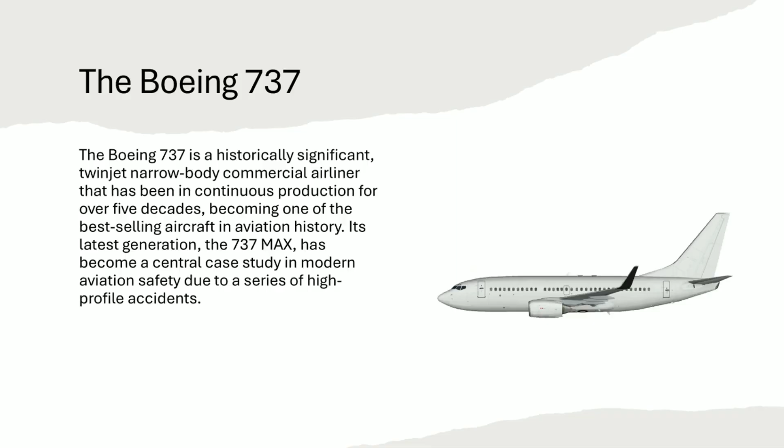The original series of the Boeing 737 was the Dash 100 and Dash 200. Development began in the early 1960s to meet the demand for short-haul jet transport, competing with aircraft like the Douglas DC-9. The 737 introduced underwing engine placement for easier maintenance and a wider fuselage, offering 6 abreast seating, which was a competitive advantage. The 737 was one of the first jets designed for a two-person flight deck, eliminating the need for a flight engineer and setting an industry standard. The first flight was in April 1967 and it entered service in 1968.

The 737 Classic series consists of the Dash 300, 400, and 500. Introduced in the 1980s, these variants incorporated more fuel-efficient, quieter CFM56 turbofan engines, which required flattening the bottom of the engine nacelles due to low-to-the-ground wing placement. The series included longer fuselage options and featured updated avionics.

The next generation, or NG series, consists of the Dash 600 through the Dash 900. Launched in the 1990s to compete with the Airbus A320, the 737 NG received a major redesign, including new wings, an updated flight deck, and a further range and efficiency boost. The 737-800 became a best-selling variant.

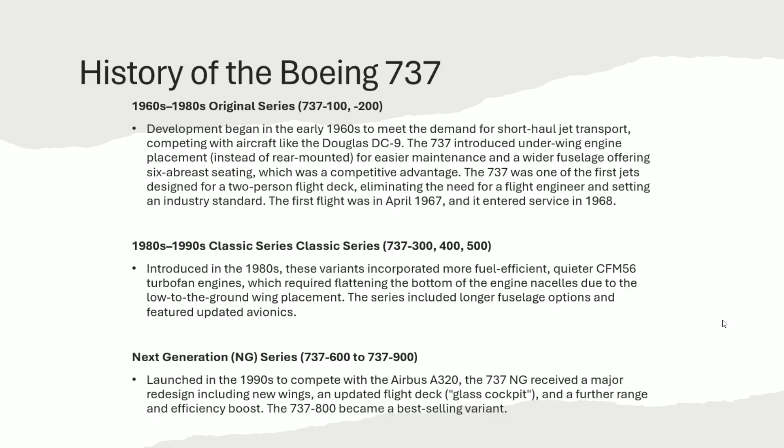The Boeing 737 MAX is the fourth generation of the 737 family, announced in 2011 to directly counter the fuel efficiency of the Airbus A320 Neo, or new engine option, by using new, larger, and higher bypass LEAP 1B engines and updated aerodynamic features, including new winglets.

A key feature of the MAX was the new engine placement. The larger LEAP 1B engines were placed slightly higher and further forward on the wing. This change affected the aircraft's pitch characteristics, giving it a tendency to pitch up during certain high angle of attack maneuvers. The MCAS system, the Maneuvering Characteristics Augmentation System, was meant to ensure the 737 MAX handled similarly to the previous 737 NG series, thus avoiding costly full flight simulator training for pilots.

Boeing introduced the MCAS software. This system was designed to automatically push the aircraft's nose down to counter the pitching tendency, using data from a single angle of attack, or AOA, sensor.

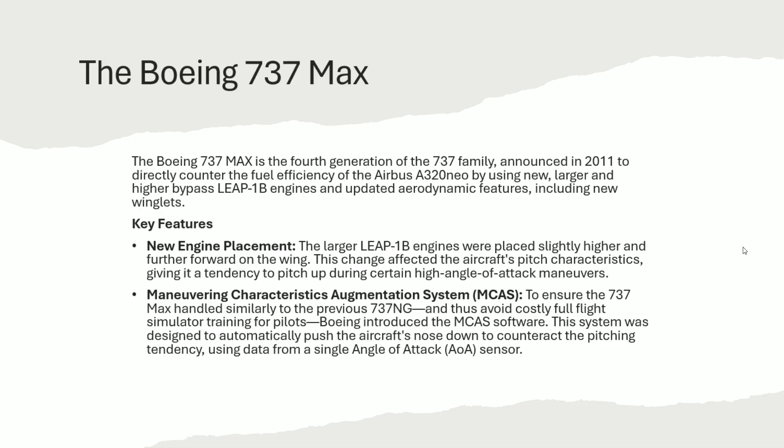Lion Air Flight 610, October 29th, 2018, registration PK LQP, departed from Soekarno Hatta International Airport in Jakarta at 6:20 a.m. local time, with clear weather, good visibility, and no cumulonimbus clouds. Everything seemed fine, especially reassuring after leaving maintenance operations the day before, where flight critical systems and the air data system, specifically the AOA sensors, had been serviced.

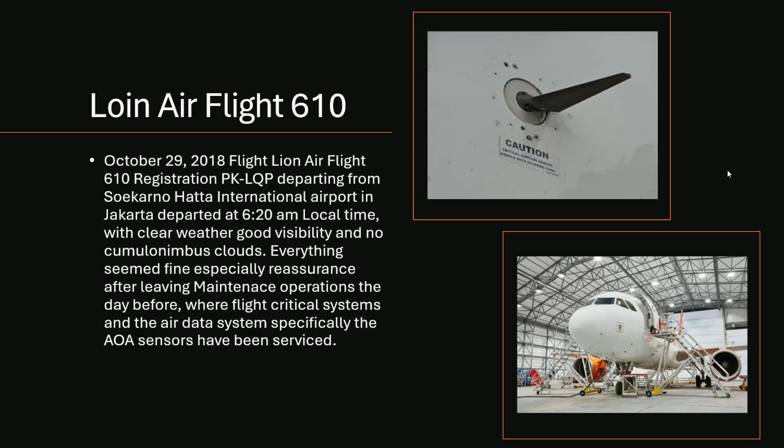As you see up here, we have one of the AOA sensors for an aircraft.

Serving as first officer, we have Harvino, commonly referred to by one name. He was also 41 years of age, with 5,000 hours of total flight time, with only 4 hours being on the MAX, and only 5 hours for the captain.

After departing with 189 people on board, including 181 passengers and 8 crew members, Lion Air Flight 610 climbed to an altitude around 5,000 feet shortly after takeoff, before experiencing erratic altitude changes. The aircraft then rapidly descended and climbed again as pilots fought to regain control in a rapidly deteriorating situation.

Here we have the flight data for Flight 610, showing its altitude and airspeed changes.

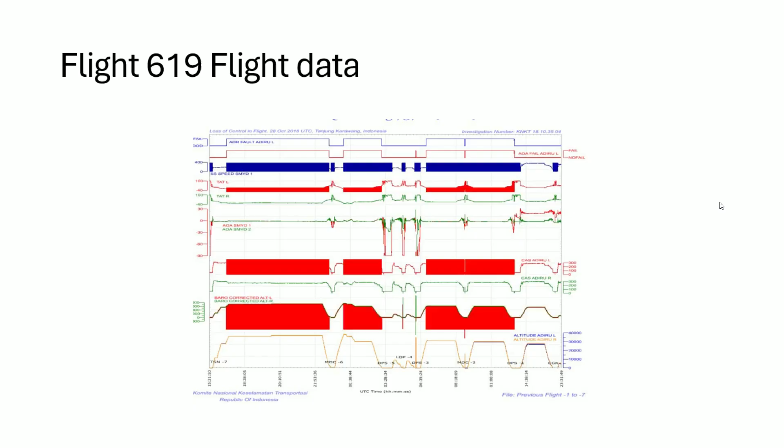Ethiopian Airlines Flight 302, which happened on March 10th, 2019, tail number ET-AVJ, departed Addis Ababa Bole International Airport, Ethiopia, at 8:38 local time, or 5:38 UTC, with a destination in Kenya.

Around 18 days earlier, there were a variety of logbook write-ups, such as flight control problems and APU write-ups with minor electrical write-ups, but everything was thought to be cleared by the time Flight 302 departed.

Aboard piloting this 737 MAX aircraft was Yared Getachew, with 8,000 hours total flight time and 4,000 hours total on all 737 variants, with around 100 hours on the MAX, slightly more experienced than the Lion Air pilots. First officer or co-pilot Muhammad had a total flight hours of 361, which is extremely low compared to FAA or US standards, where you generally have to reach 1,000 or 1,500 hours of flight time before being able to fly as first officer, with a total time of 207 hours on 737 variants and 56 hours on the MAX variant.

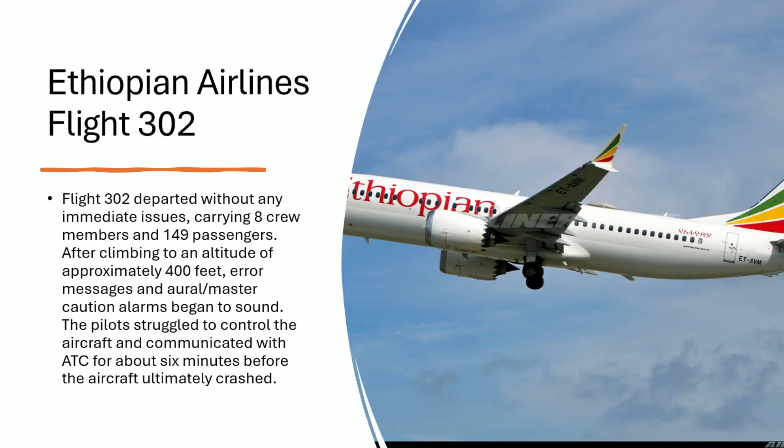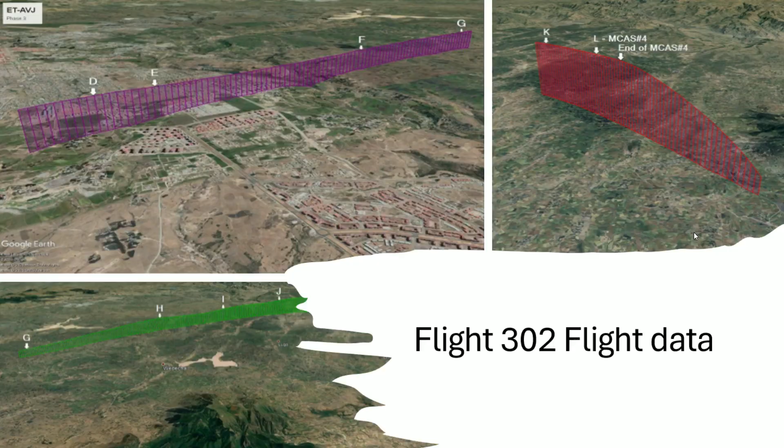Here we have some of the trajectory provided by the Kenyan and Ethiopian Flight Authority. Up here we also have where the fourth MCAS takeover happened and when the last MCAS takeover happened.

Crash analyzation. Both Lion Air Flight 610 and Ethiopian Airlines Flight 302 were tragic accidents that didn't come out of nowhere. In both cases, there were warning signs before the actual flights, recorded in the aircraft logbooks and through previous crew write-ups, such as multiple write-ups for Flight 610 made by flight crews about unreliable airspeeds and altitude indicators, as well as stick shaker activation, which is where the control stick in the cockpit shakes rapidly back and forth or side to side shortly after takeoff. These are classic signs of AOA disagreement.

While Flight 302 on March 9th, 2019, the day before, the flight crew experienced erratic flight control behavior shortly after takeoff. The MCAS system was activated in response to a faulty AOA sensor, but the pilots manually trimmed and turned on the stabilizer trim cutoff switches, which cuts off the MCAS.

Lion Air Flight 610 took off from Jakarta on October 29th, 2018, with 189 people on board. In the days leading up to the crash, the aircraft had repeated write-ups for unreliable airspeed and altitude indication. On the previous flight, the stick shaker had gone off right after takeoff, and MCAS had already tried to trim the nose down. The crew on that flight managed to fight it manually using cutout switches and landed safely.

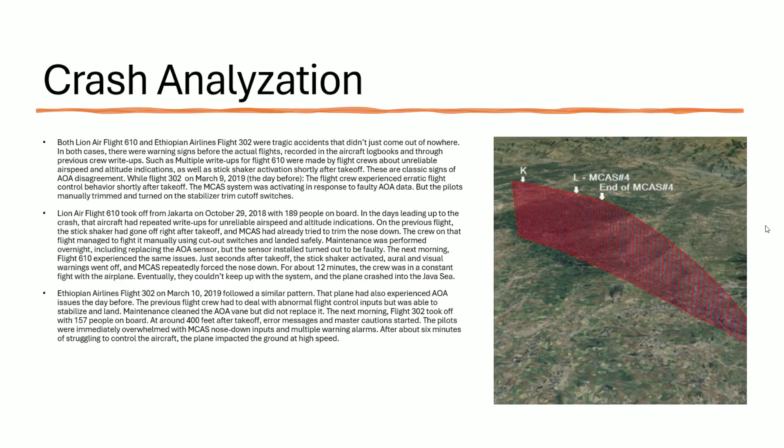In both cases, the real issue wasn't just failure itself. It was that the system was allowed to fly again even after repeated warning signs. MCAS was poorly designed to rely on one sensor. The crews weren't fully trained on how it worked, and the faults recorded earlier were not resolved in a way that addressed the root cause. These accidents weren't random. They were the result of a chain of events: a faulty sensor, a flawed system design, poor communication, and gaps in training and maintenance. Those logbook entries before the flights tell a story that was ignored until it was too late. Not because the technicians didn't do anything about it, but because Boeing failed to equip and notify operators of a system that was flawed.

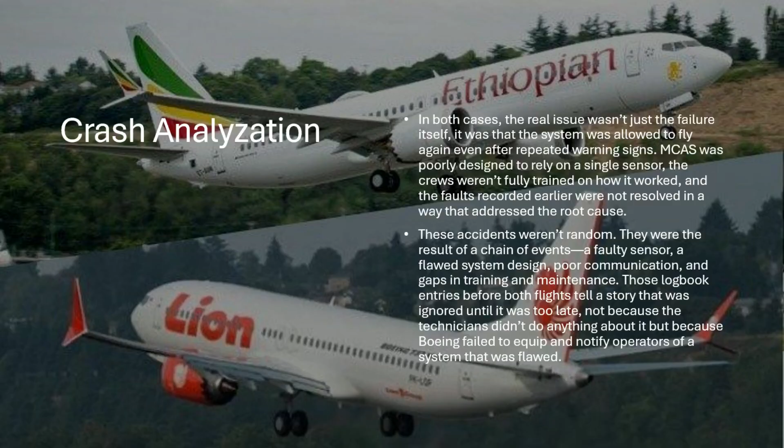The failure of the Boeing company. The 737 MAX was embarrassing as a company because they knew that the new updated MCAS system was going to require more training for pilots and engineers. Boeing was competing with the A330, which was a more fuel efficient aircraft compared to the previous generation of 737s. Due to this corporate greed and hush-hush agreements with test pilots, in both of these incidents, it was Boeing's failure to address the additional training required to fly the new 737. The sprint to get the 737 MAX out flying was 100% profit first, instead of looking for safety and efficiency with engineers.

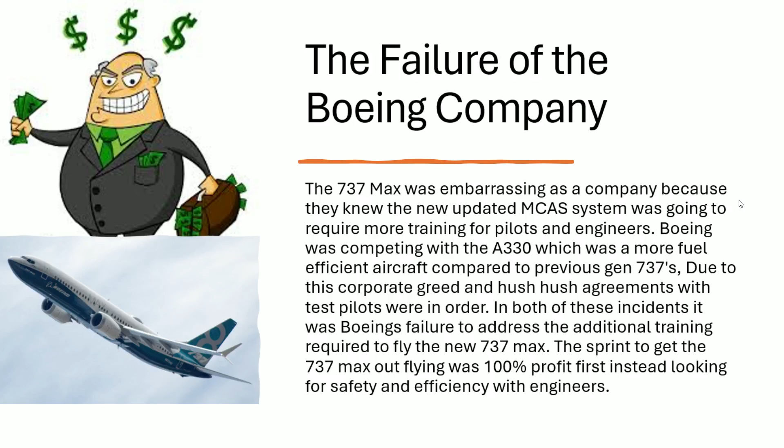Latent conditions are hidden system flaws that lie dormant until they align with active failures. In the case of the 737 MAX, these were embedded deep within Boeing's organizational, regulatory, and design processes.

Organizational pressures such as production deadlines and frequent cost cutting led Boeing to prioritize rapid development over thorough safety validations of its aircraft. Boeing decided to retrofit the MAX rather than do a redesign, introducing compromises littered throughout the aircraft.

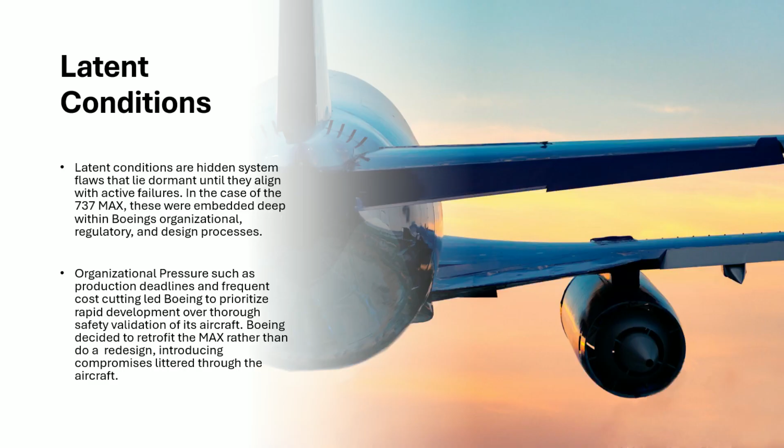As we talked about in the crash analysis, a lot of these were covered, but a list of direct latent conditions are: the MCAS was designed to rely on a single angle of attack sensor, ignoring redundancy practices. Delegated certification authority allowed Boeing to self-certify key systems, reducing the FAA's direct scrutiny on the 737 MAX.

Boeing assumed pilots could override the MCAS system without additional simulator training, which obviously played a massive role in both of the accidents that we talked about. If they were able to turn off the system, then they probably would have survived.

No synthetic sensor model was used to cross-verify angle of attack data, leaving the system vulnerable to single-point failures. And these latent conditions formed the holes on the Swiss cheese model, which we're going to talk about now.

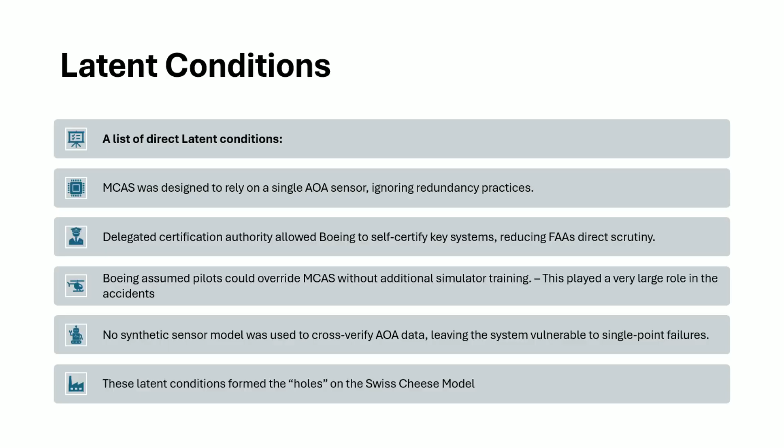All right, here's the Swiss cheese model. So basically, a Swiss cheese is where there's layers of defenses and there are holes that penetrate. There are failures that penetrate the holes, and if the holes line up, there will be a failure. So here's an example visualization of what it will look like.

So on the first layer of the cheese, which is pilot training and checklist, there is basically low or minimal pilot training with almost no specific instruction for the MAX aircraft, because it was designed to operate similar to the previous 737, which is the 737 New Generation, I believe.

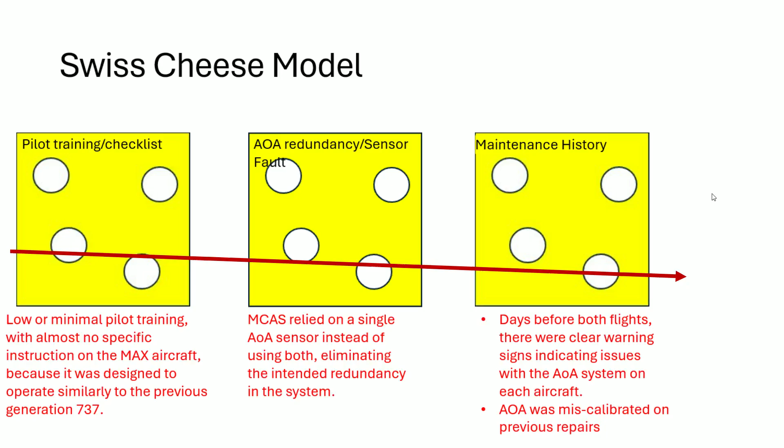The next layer of the cheese is AOA redundancy slash sensor fault. In this hole, the MCAS relied on a single AOA sensor instead of using both, eliminating the intended redundancy in the system. Within the maintenance history, days before both flights, there were clear warning signs indicating issues within the AOA system on each aircraft, and the AOA was miscalibrated on previous repairs.

Then the next hole within the system is certification. Boeing technical pilots had misled the FAA about how the MCAS functioned by downplaying its role. They avoided triggering extra training or deeper review, leaving a critical system less scrutinized during certification. And there was a lack of FAA oversight of Boeing's organization designation authorization.

Within the repair process, the repairs performed for both Flight 610 and Flight 302 were insufficient. For Flight 610, the newly installed AOA sensor was improperly calibrated, which left the issue unresolved. For Flight 302, maintenance involved only a sensor cleaning, but not a full inspection or replacement, allowing the underlying problem to persist.

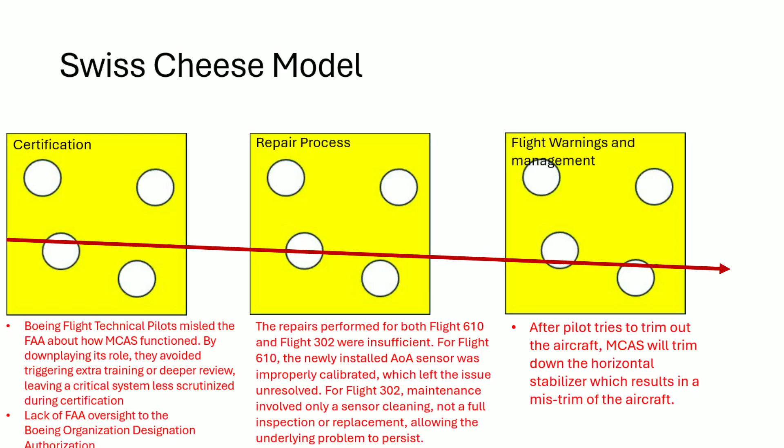Within the flight warnings and management tree, after the pilot tried to trim out the aircraft, MCAS would trim the horizontal stabilizer, which results in a mistrim of the aircraft, which leads to a total systems failure. Bingo bird!

Fixing the cheese. So basically, we are blocking off the holes within the layers of defense.

Within pilot training and checklist, there's revised pilot training to recognize erroneous stabilizer movement and effects of potential angle of attack failures. And Boeing added slash revised 8 new non-normal flight crew procedures to the airplane flight manual.

AOA redundancy and sensor fault: AOA discrete alert is now standard. There's a single nose-down command, which is not repeated. It limits MCAS movement to ensure sufficient pilot input, and it now, shocker, uses both sensors.

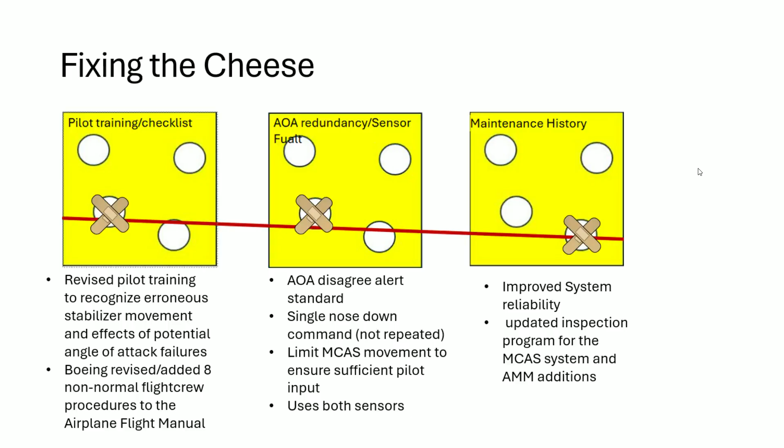With the maintenance history, there's improved system reliability, an updated inspection program for the MCAS system, and AMM additions.

Within the certification, the FAA has increased oversight at Boeing, but as of recently, in September I believe, Boeing has gotten some of its certification powers back.

Then within the repairs process, a final check is introduced to make sure no bias was introduced to the AOA sensor after replacing it, and the operator must test the AOA sensors before it returns to service.

And finally, the last layer of fixing the cheese: Boeing implemented a cross flight control computer, the FCC, trim monitor, which effectively detects and shuts down erroneous stabilizer commands from the FCCs.

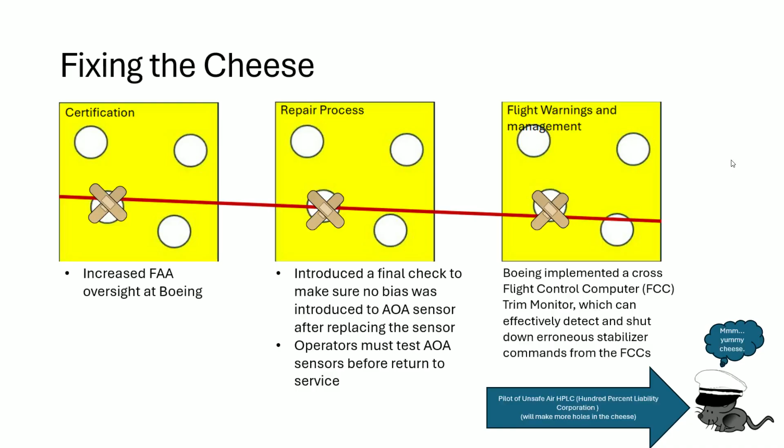And as much as we can fix the cheese, there are sometimes ways new holes appear that we might not detect, which is why there's our little mouse, basically like, ooh, gonna make some more holes in the system. And then once there's a hole in the new cheese, there will be another total systems failure.